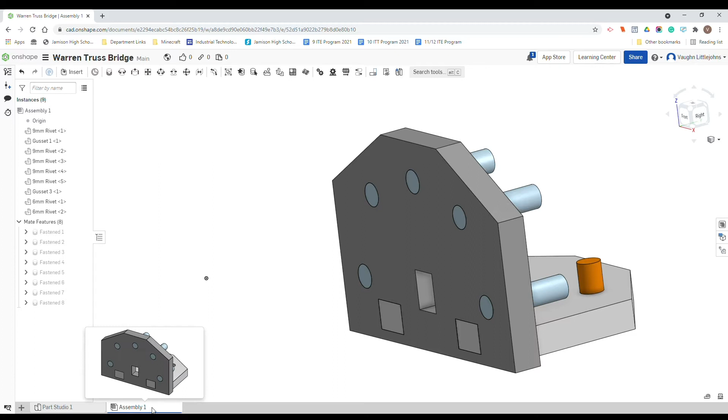Once you've opened up your Truss bridge in Onshape, we're going to move over into the assembly. Down in the bottom left hand corner, you just need to click Assembly 1. Now we need to insert our parts, so go up to the top here and click Insert.

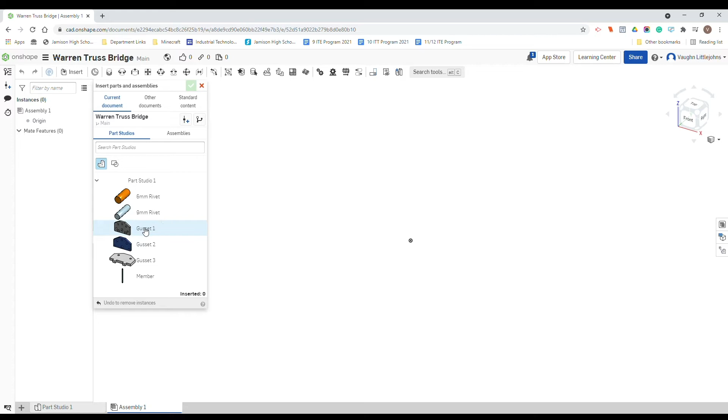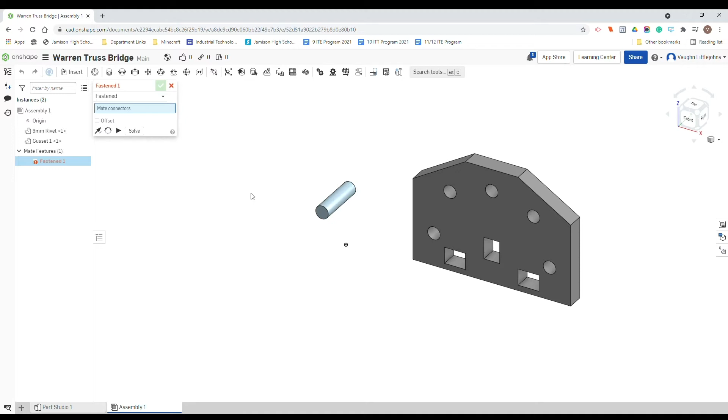Our first kind of connector or fastener is up here. These are your fasteners, this little bar just here, and we're going to use a fastened mate. If we click that and hover above, you can see this little line - that's our Z axis.

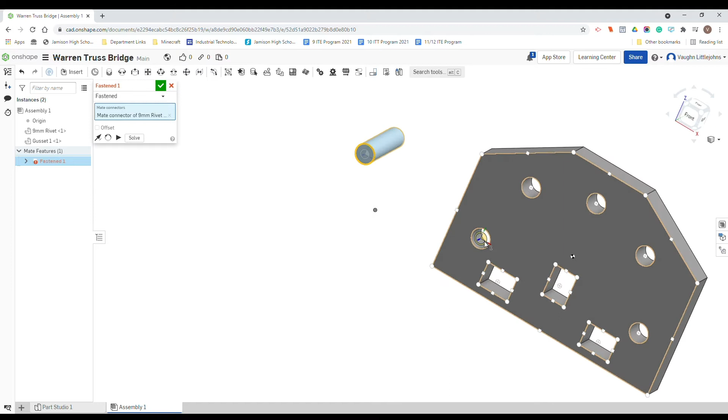I'm going to click on that, and the first one I want to insert will be down in this bottom left hand corner. Now you just click on that little blue line. This all depends on your orientation, so if I change my camera angle, my blue line will shift at different spots.

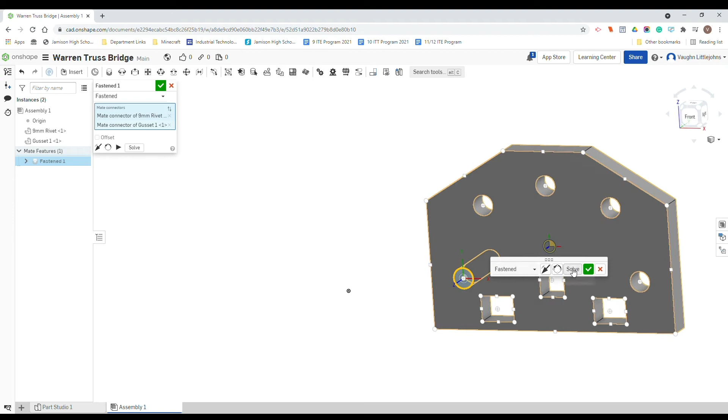I'm just holding my right mouse button to rotate around. Now I want to click that one. Once it's in there and matched up where you want it, you just need to click solve, and then the green tick, and that commits it to that join.

If I just close it, it'll automatically go for your next one, so this is fasten 2, and I want to cancel that. You can see just here when I hover above it, that's where that fastened mate is.

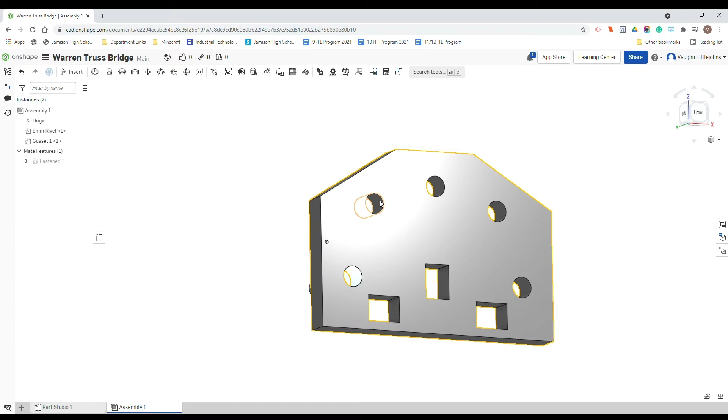So what we're going to do is place rivets in just here as well. I'm going to insert another 9mm rivet, place it, push the green tick, and then remember up here we're going to go fasten mate. Click the little blue line, click the blue line on this one, and solve tick.

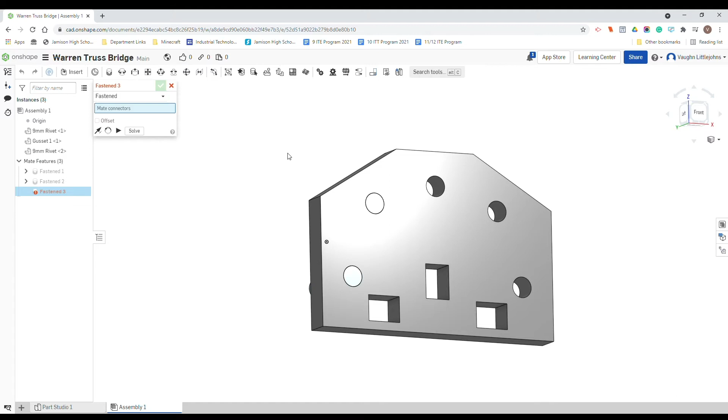Now I'm just going to undo that for a second, and I'll show you what happens if for some reason it didn't line up where you wanted it. If I do that again, I've just gone Control Z - remember, you can push Control Z and it'll take you back one step. But I'm just going to show you this in case it does this for you.

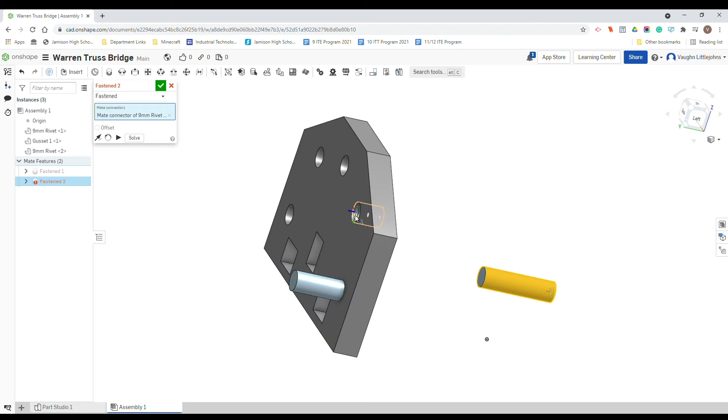So if I click that blue line, but I want it on this side, maybe it goes here. If you look around, it's actually not flush on this front surface. If that happens to you, it's a simple fix.

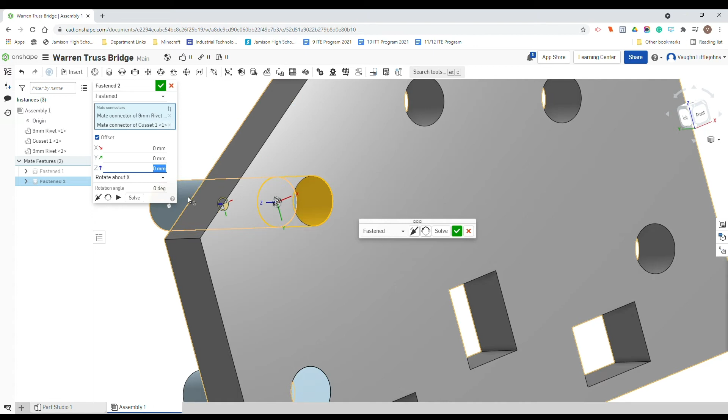You just click this button up here, it says offset, go to the blue arrow, which is the Z, and remember we are using a 3mm thickness material, so we just type in 3, and now it's gone outwards. So if we put the opposite, we go -3, and then it's flush. Once you've got what you want, remember you go solve, tick, and that is our first part.

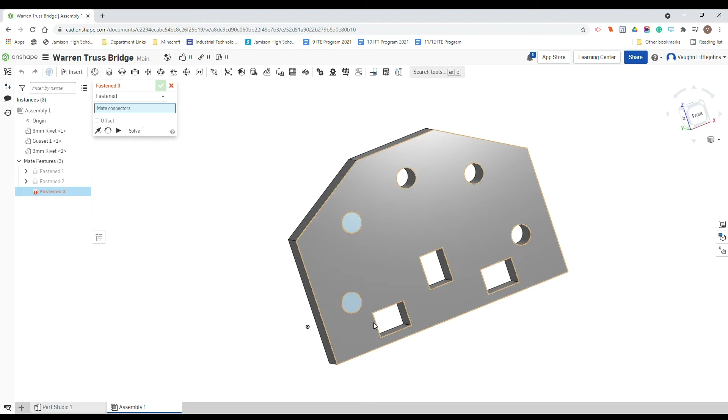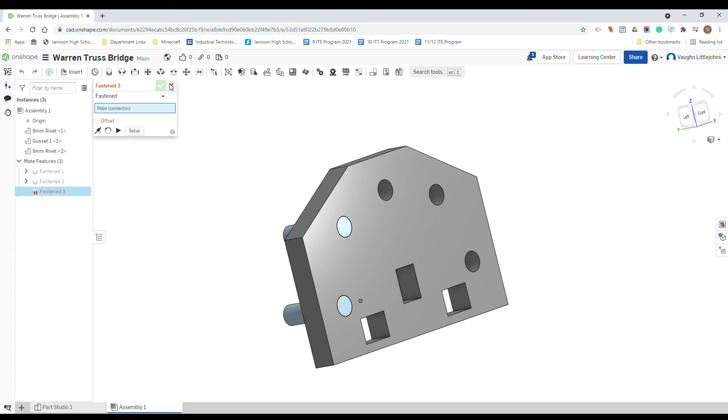So now you've just added your first 2 rivets. I want you to go ahead and add the rivets into the other circles. Now we will delete some of these later, but it's nice and easy to insert them all now and then delete later when we don't need them.

Remember, click insert. Now I've got 3 holes, so I can just drag over 3 rivets and then click tick, and remember we're using a fasten mate.

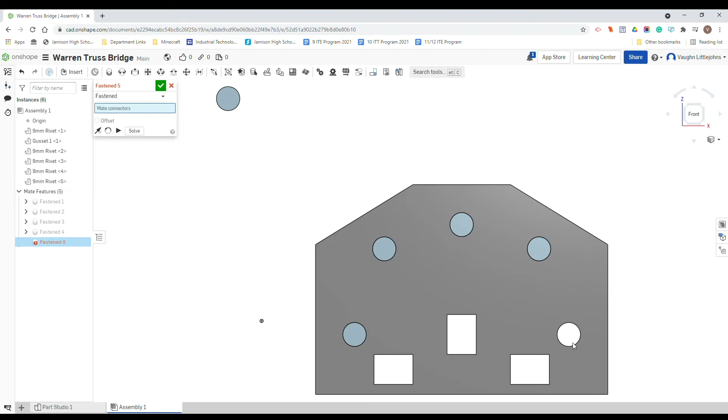You can also always go to your front view, it might be easier for you, and then it's automatic. You just click the center of your circle, solve, tick, and so on. Now if it doesn't do it, you just see the little number 1 next to your cursor. That means you've selected the piece, so if you don't see a number next to it, it means you haven't clicked it. Solve, tick. So as you can see, we've got all our 9mm rivets in our gusset number 1.

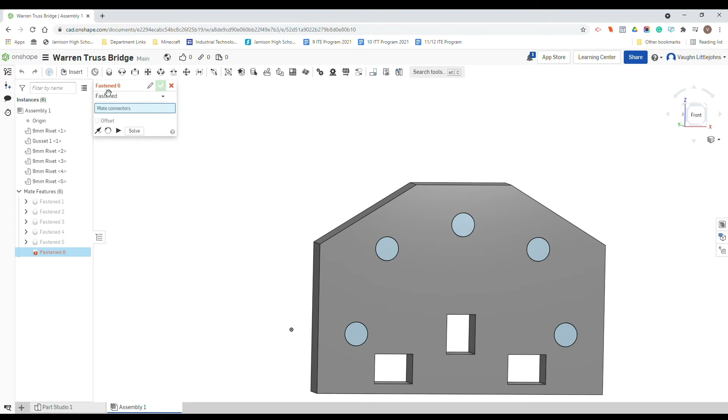I'm going to close that fasten mate because I don't need it anymore. And this is our first gusset sorted.

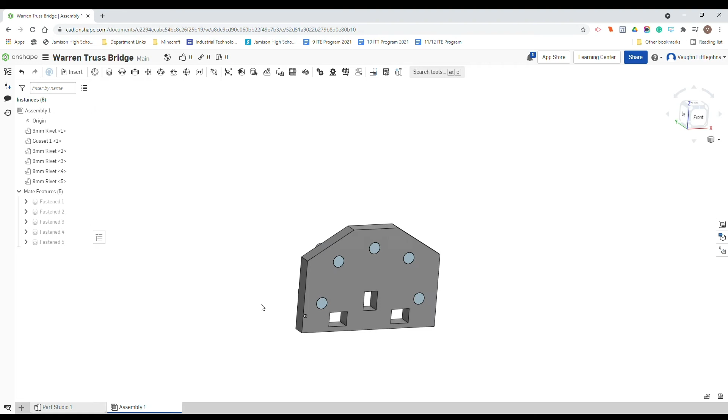Now the next thing we're going to do is actually insert our gusset that goes down the bottom and connects into these little squares here. So we click insert, we go to gusset 3, and we place it there.

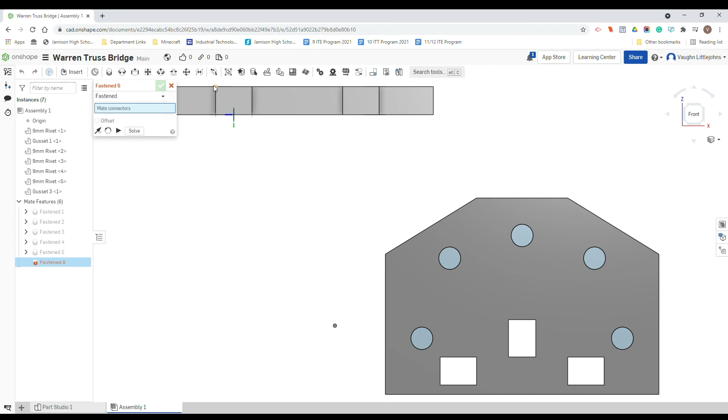I'm going to click tick, and it's the same mate that we want to use, so it's the fasten mate. Now again, it's any axis, so if I go to that front view, I just want any of this. Now I could either go to the center or I could go to these corners. You just got to make sure that it's exactly the same down on the other piece. So if I click the center, see it doesn't give me the option, so I'm not going to use that one.

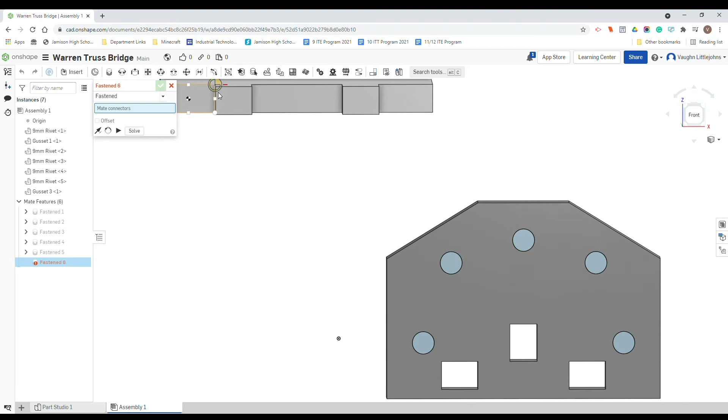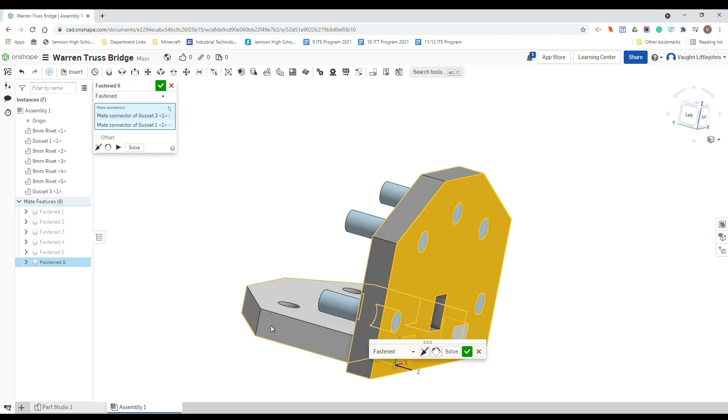So if I click off it, I go fasten mate again, and I want this corner. So if I go to a different angle so I can see a little bit better, I want to zoom in and click that blue corner, making sure the blue little line, that little Z line, is facing towards you or towards this piece. Now it was this same matching corner here, so I click that, and as you can see, it's connected down here. Now remember that the really important thing here is you actually need to click solve to successfully solve this assembly. So click that and then the green button. That's our gusset 3 connected to gusset 1.

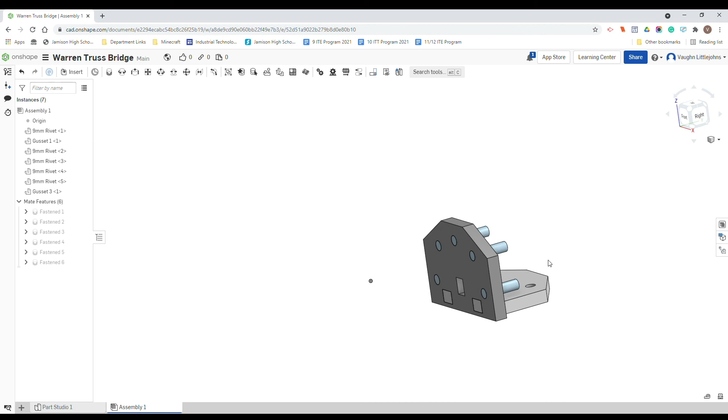So now we've got our 2 gussets there connected and we've got a couple of rivets. Now we want to put the rivets in these 2 holes next. So they are the different ones, the 6mm, so click insert 6mm.

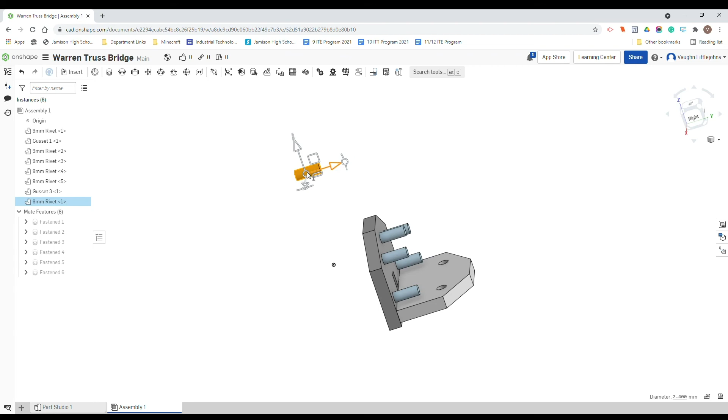Now if you can see, they're on a different rotation, aren't they? So I'm just going to click tick because I only want one of them. I'm then going to select it once, and as you can see, I've got these different arrows. If they rotate, you can get different ways. Now I want to rotate it so I can get to this angle here, and then I can drag it and change that to 90 degrees.

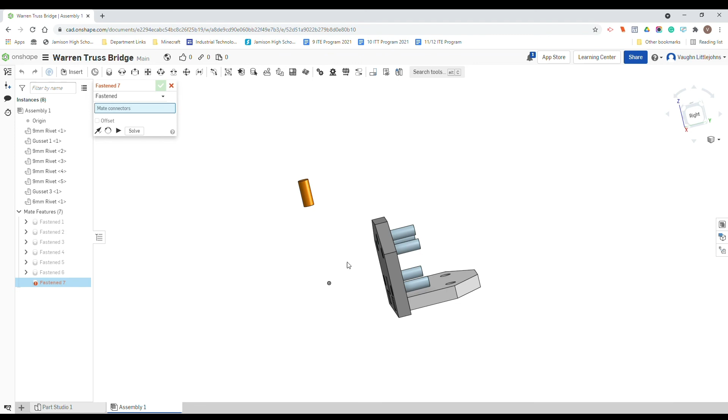So anytime I use one of these rivets, I'm just going to use this one from now on. So again, fasten mate. Now I want to get to an angle that is best suited, so I'm going to go underneath, hold my shift button and my mouse jog wheel, and then I can pan, as you remember, and then I can zoom in. Click this button, zoom out, and then I want to come over here so I can see that blue little line and click it. Solve and tick.

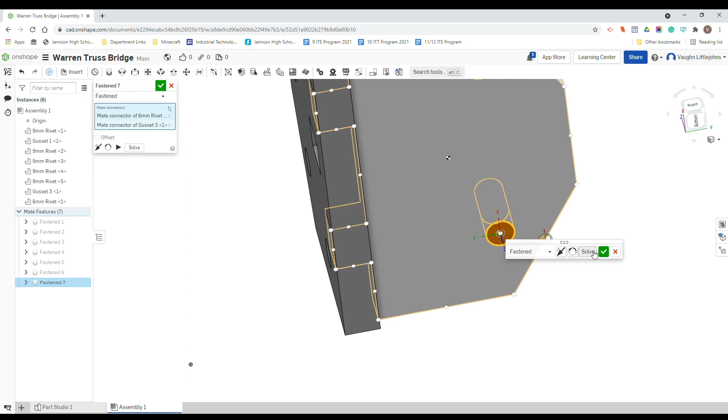So you're just going to do that with this other hole here as well. So remember now, because we've already rotated it, we don't need to rotate it again by inserting a new one. We can just copy this. So Control C, then click off, then Control V, and there it is.

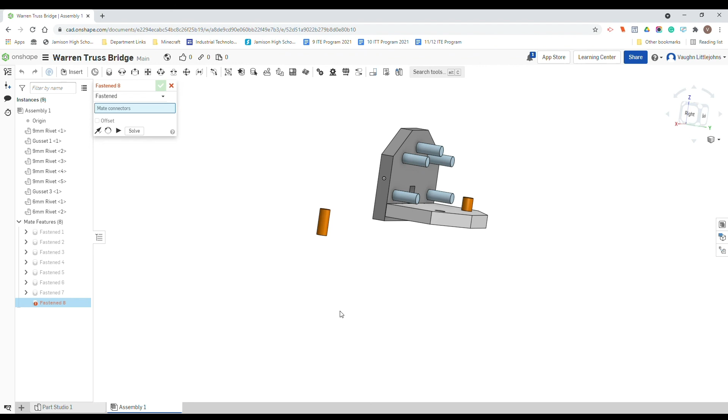So again, fasten mate, rotate your screen underneath, holding your right mouse button in, click that little blue line and then the blue line underneath. Solve, tick. And that is our first component basically assembled.